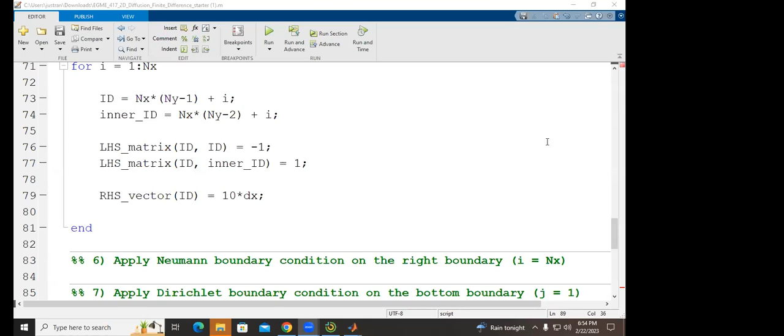Dr. Tran, this meeting was already recording when I stepped in. Yeah, it starts recording when the first person shows up. I have it saved to the cloud because I'm using the podium computer, not a personal laptop. In the past, I recorded locally and had to wait for it to process, but since this class ends at 8:15, I don't want to wait an extra 30 minutes. So I record to the cloud, and because of that, it's just the first person that shows up that starts the recording.

I was just worried that you're going to get an hour of nothing because maybe the person beforehand left it on recording.

Sir, I have a quick question. Can I share my screen? It's about the grading. I have no complaints, but I'm confused about something. Thank you for allowing me to share. Let me go to the grades. Okay, so can you see my screen? Yes. So I noticed that for assignment number 2, it went to Turnitin, and I'm not worried about that because my work is original.

However, I got a high plagiarism percentage because I copied and pasted the questions of the assignment into my homework. That happens a lot in this class because everyone's kind of turning in the same thing, and if you copy the questions directly from the homework, that's going to flag because everyone has that too. There are some cases where it's like 90, 95, 100%—that's obviously suspicious. But for most people, they end up in the 60s, 70s, even 82%, and I check all of those.

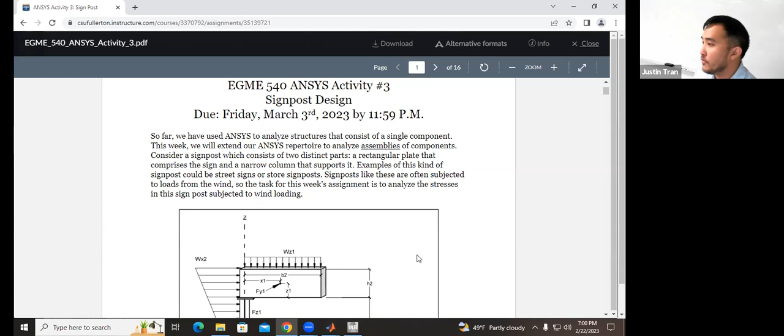All right, so today is the only lecture we're having this week, but thankfully it's an exciting one. We're on our third ANSYS activity, 3rd out of 8 in this class. This one's interesting because it's going to be our last activity on the basics. After today's activity and all the lectures we've had, I'd say you have a good grasp of all the basics for ANSYS.

After today, you guys are ready to do a more independent project, which is going to be the midterm project. On Monday, we're going to discuss the midterm project, what it is, what you're expected to do, and then you'll have about a month to work on it. But for today, we're just going to be doing an activity.

The point of today's activity is to get you familiar with how to work with assemblies. In reality, I don't think it's that hard. I'm just making you more aware of the options you have when you have multiple parts in your assemblies, more so than just one component.

The subject for today's activity is going to be a signpost. Visually, it looks like one of those signposts you see over the freeway that tells you you're about to miss your exit. You have a big rectangular sign supported by a cylindrical post, and then it's all fixed into the ground at the bottom of the post.

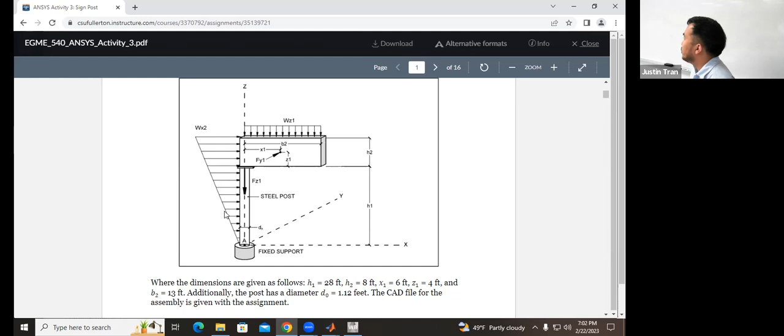The dimensions for the signpost are here, but that's kind of irrelevant because I give you the CAD file, but you can verify those measurements. And we have all the loads here as well.

Similar to the last activity, I'm going to focus mostly on the new stuff. A lot of the basic things like meshing and applying the boundary conditions, I'll leave it mostly up to you, and we'll focus on the newer things in this activity.

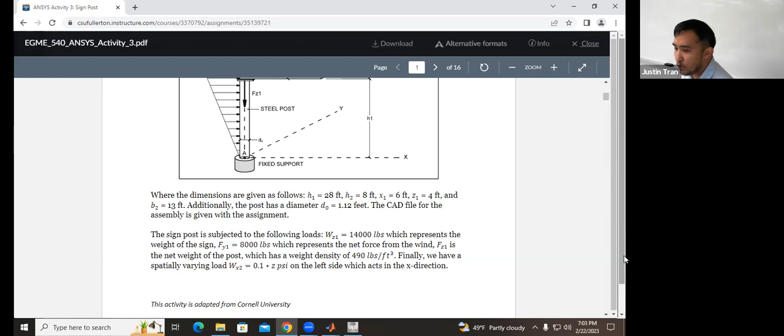To get started, you can download the activity instructions from the website. Go to assignments, go to assignment 3. This first link is the activity specifications, and then we have 2 CAD files. The first CAD file is the one we're going to use in the activity, and the second CAD file is for an extra assignment on top of that.

So that's the plan for today. Are there any questions I can answer before we get started?

All right, let's go ahead and get started. Go ahead and download the CAD file here. Let's open up Workbench.

Just like before, let's go ahead and create a static structural analysis here. Then let's load in our geometry. Right click on geometry and import, then import the geometry that you downloaded. It should be solid signpost geometry base.

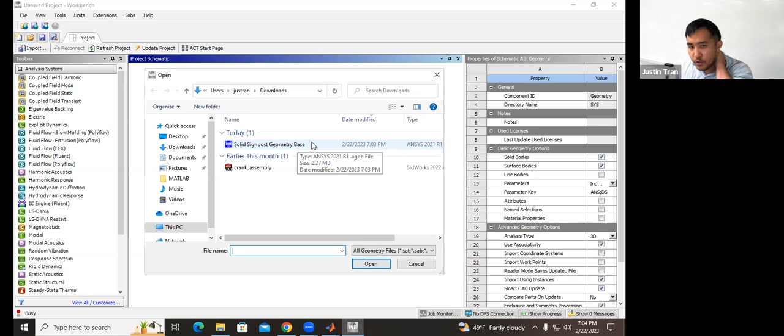The nice thing about this geometry is that it was actually created in ANSYS, so there should be no compatibility issues whatsoever. Let's go ahead and double click that. Automatically what you should see is a green check mark next to the geometry that tells you your import was successful.

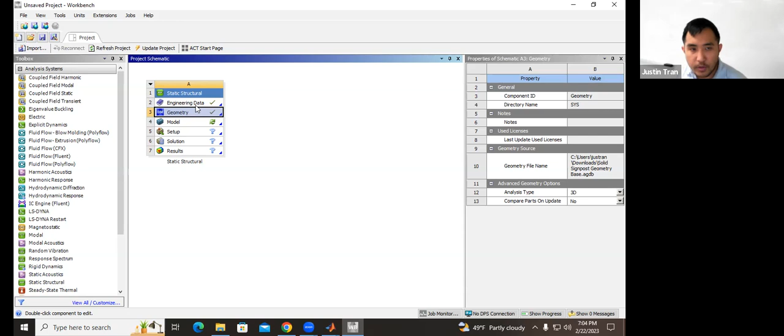Before we jump into Mechanical, let's make sure that we have all of the material properties that we need. So let's go ahead and double click engineering data.

You'll see that the only material we have right now is structural steel. So for this activity, we're going to need another material, because one thing I'll illustrate later is that when you have an assembly of parts, you can assign different material properties to each of those parts. So let's add aluminum here, but let's do it the lazy way.

We're going to use the pre-built aluminum that's already in ANSYS. To do that, let's click on engineering data sources—it looks like a series of books right here. When you click on engineering data sources, it should open up another menu, and from there you should be able to add any kind of material you want. There are three menus here.

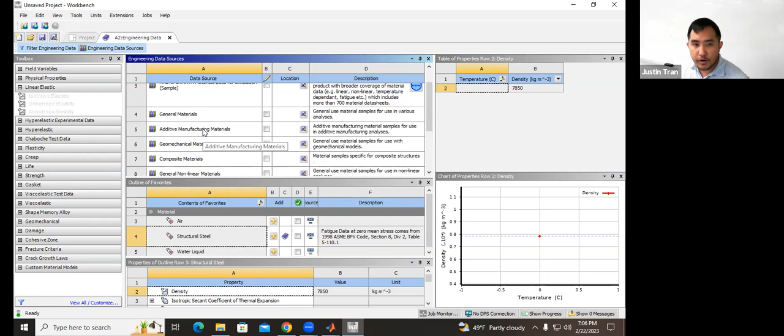Let me lower the bottom one so you can see. This top window, called engineering data sources, shows all the different sources of materials you can have within ANSYS. We have ANSYS GRANTA material data for simulation, which is super long, general materials, additive manufacturing materials, geomechanical, composites, general nonlinear, explicit hyperelastic materials—all good stuff.

The material we want is inside general materials. If you left click general materials once, that's going to change this middle menu right here, and you'll have a lot more options available here in the middle.

If you scroll down this menu, you can see there's quite a few options—not that many, but a few. We have aluminum alloy, concrete, copper, FR4, cast iron, magnesium, polyethylene, stainless steel, structural steel, titanium alloy. So there's a lot of stuff.

To add one of these materials to your workspace so you can use its properties, you click on this plus arrow next to the material. For this activity, we're going to make use of aluminum. Let's left click on aluminum.

If you left click on aluminum, you should see a book appear next to that aluminum alloy, telling you that it was added to your project. You just click the plus arrow once.

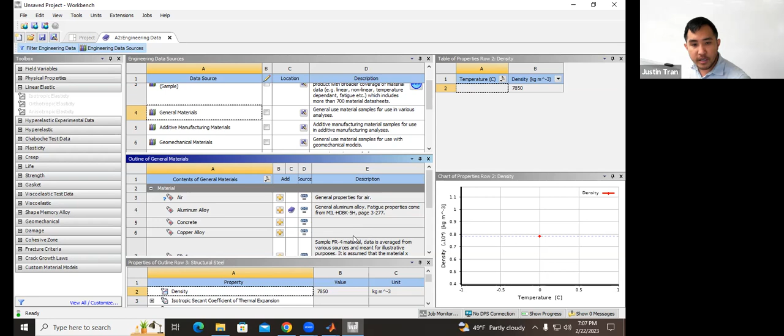If you want to verify, left click on engineering data sources again, and that'll close this menu. Once closed, you should see that you have two materials now: aluminum alloy, which we just added, and structural steel, the default material.

If you're doing a project and using a material that's inside the library, I'd recommend using the ANSYS ones, or at least checking what the properties are before adding your own material. We can check and verify these material properties as well.

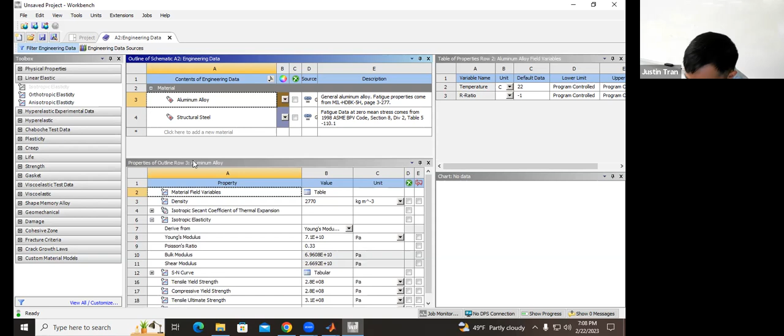If you left click on the aluminum alloy, we can check its material properties here. The nice thing is that it not only adds the linear elastic material—so we have the Poisson's ratio and the Young's modulus—but also the density, and you'll see today that that's actually going to be useful. We'll use the density for something in the activity.

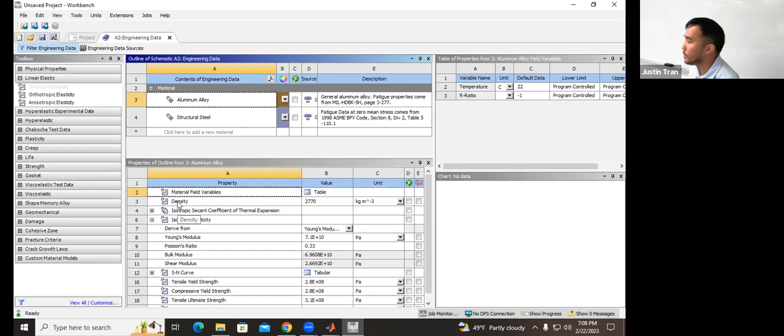So was everyone able to add aluminum alloy using the engineering data sources? Any questions on this part? All right, now that we've added the material, let's go ahead and close this.

Let's open up ANSYS Mechanical by double clicking on model right here.

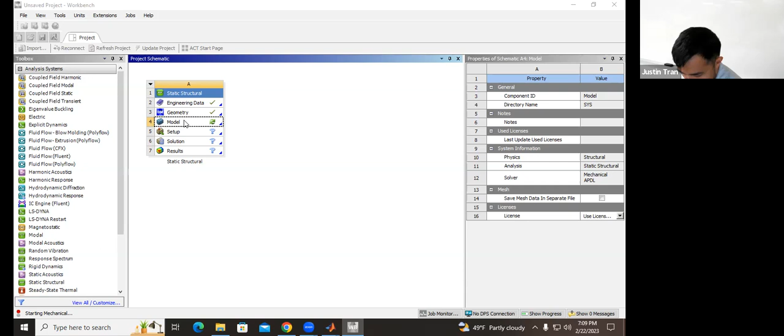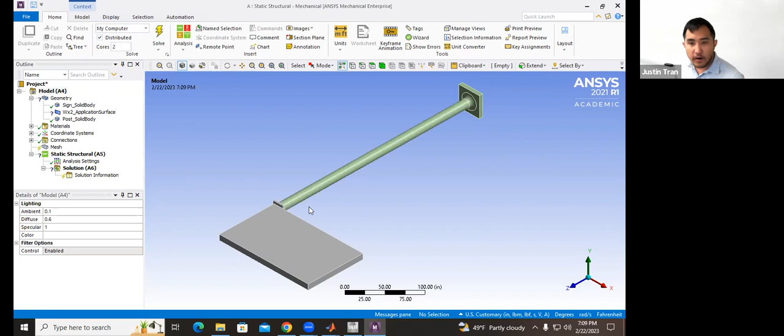If you imported the geometry correctly, you should see the signpost. Dimensionally, it's a little different than the one in the picture, because the picture isn't to scale, but you should see something that looks like this. The first thing we'll look at here is the geometry section.

You should have three objects there: a part for the sign, a part for the post, and this WX2 application surface with a question mark next to it. We'll come back to that in a second.

We'll talk about what that question mark is, and we'll first talk about what this surface actually is. But first, we'll assign the material properties for the post and the sign.

When you're working with an assembly of parts, oftentimes those parts are made of different materials. So the first thing you need to do is assign the proper materials to each part of the assembly. Let's start with the post. If you look at the project specification, you'll see the post should be made of structural steel. To check the material your part is using, left click on that part in the geometry tree, then check the details menu on the bottom left to see the material assignment.

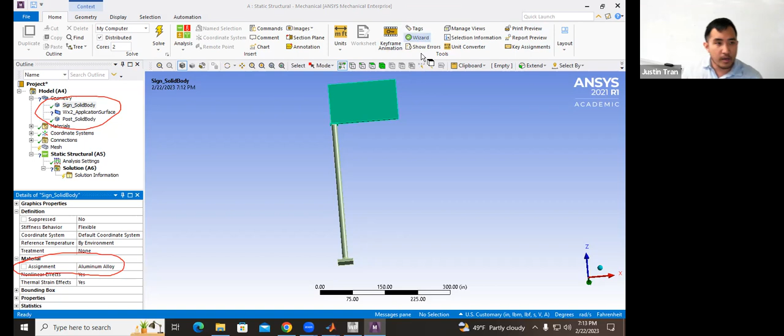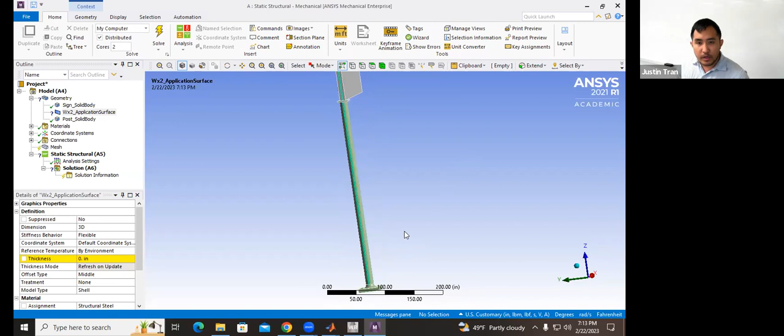Now let's go on to this WX2 application surface. You can see it on my screen — when you click on WX2 application surface, the left side of this post lights up. If you rotate around, you can see this surface is like a thin strip, almost like a strip of duct tape that goes from the top of the sign to the bottom. If you zoom in, you can see it's basically just a very thin strip — its thickness is nothing.

A surface like this, I like to call a phantom surface. It's a part that's not structurally part of the original geometry. If you look at a typical signpost on the freeway, there's not going to be a very thin piece of material running down the side. So this strip doesn't actually exist in the real geometry — its purpose is to allow us to apply a loading in an interesting way.

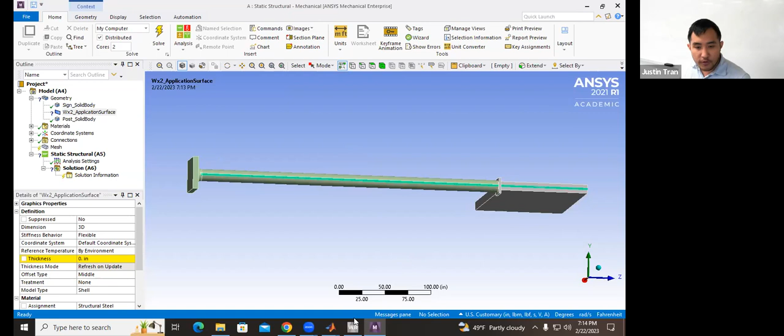If you go back to the project activity specifications and look at this diagram, we have this load called WX2. WX2 is basically pushing on the signpost going from left to right.

And so what that load represents is the wind load. When you have wind blowing against the sign, that load represents that. What's unique about this loading is that it's a variable load - we'll talk about that in a bit. But this loading stretches up from the very top of the signpost all the way to the bottom.

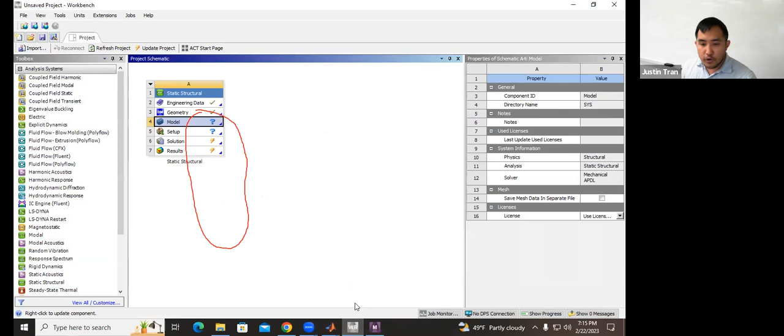Okay, if you go back to mechanical, we know from previous activities that if you want to apply a load onto a part of the structure, you have to be able to click on that surface. You could click around all you want here - try clicking on the post, try clicking on the sign, on each edge. There's no natural surface on this geometry that stretches from the very top to the bottom. Nothing is going to give you that exact surface.

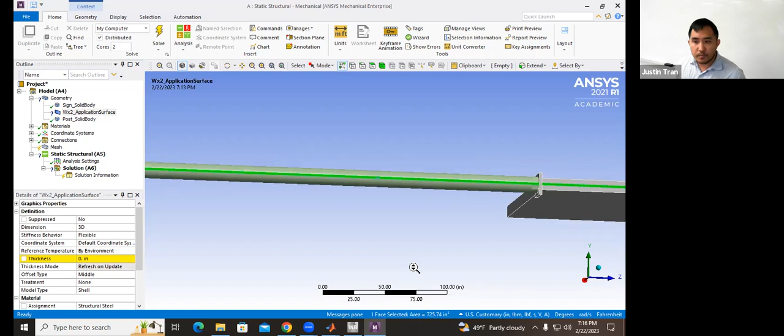But because of the way this is loaded, and because of the way we want to set this up, we want to apply a load that stretches from the top to the bottom. One way to accomplish this is to specify a phantom surface like this so that you can apply this load. If you click on this surface right here, you can see that it actually does stretch from the very top to the bottom, which normally would be impossible with just the natural geometry of this CAD file.

So what the author of this CAD file did was create that surface so that we could apply that load. This is a fairly common technique because a lot of times you're going to want to apply a load on a surface that may not be natural to your geometry. So this is basically what you would do.

The only thing we have to specify here, and the reason why we have this blue question mark, is that because it's a phantom surface, we don't actually want it to have any physical thickness. So this person specified it as a pseudo 2D surface, or pseudo shell surface, where you have to specify the thickness manually. If you look down in the details window, that's the thing it's asking you to specify.

Dr. Tran, I have a question - from my understanding, whoever designed this CAD already inputted that quote unquote phantom surface. Yep. Will we learn how to do that ourselves eventually? Yep, yep, I have a handout for it. It's online, and we'll go over it before we talk about the project. Sounds good.

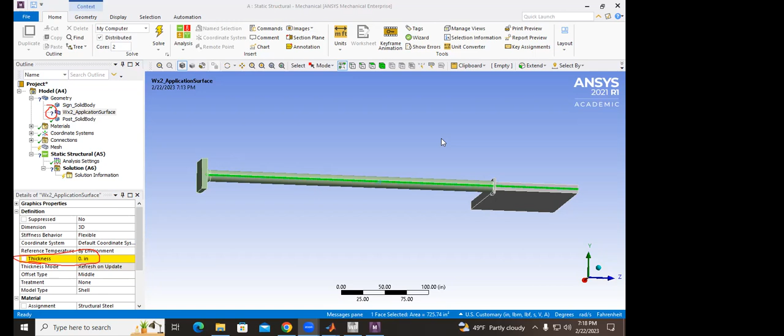So the main thing is that we have to specify a thickness, because right now ANSYS doesn't know that this is a phantom surface. Only we, the users, know that this surface actually shouldn't exist in the geometry. So when ANSYS is asking us for thickness here...

Okay, question? So you said 0.001. Yeah, it doesn't really matter. You can do 0.001, you can do 0.1, as long as it's small enough that it doesn't matter. I just like 0.001 because it's really small.

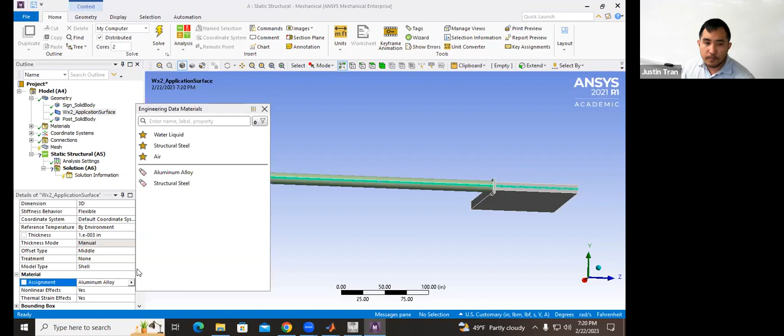Right, and of course, this strip here is registered as a separate part in the geometry. Technically you can also give it a material, but because it's so thin, it's not actually adding any structural strength. So it doesn't really matter what material you assign it - you can give it structural steel, change to aluminum if you want, it doesn't matter because it's so thin that it won't add anything of substance.

All right, any questions on this? Okay, so that's the geometry, right?

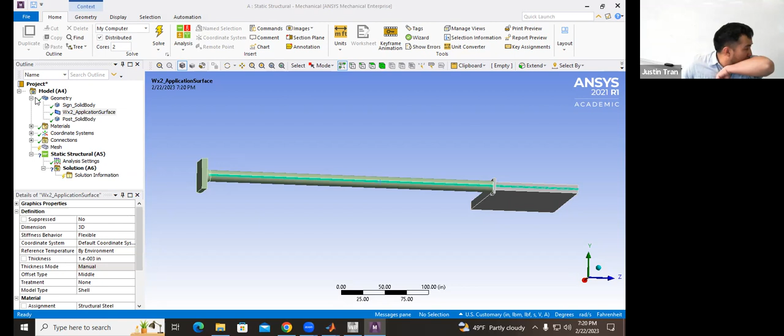Okay, so first thing when you're doing assemblies is that you need to assign materials to all the parts. That part is fairly obvious. The next part we'll talk about in assemblies is connections.

When you have multiple parts in an assembly, you need to define to ANSYS how these parts are going to interact. Let's look at one contact region here to illustrate what I mean. For me it's contact region 2, but for this part it doesn't really matter all too much.

What you'll notice is that if you expand this section for connections and go to contacts, when you click on each contact region, it should show you the two parts that are in contact and the area where they're in contact.

For this contact region 2, this is the contact between the sign and the post. If you look at this, we have these two surfaces here which are interacting with each other. ANSYS gives you the option to define how this interaction is going to go.

The main thing you'll see in the bottom left is the type. The type of connection will basically tell you how those parts are going to interact. The default is bonded.

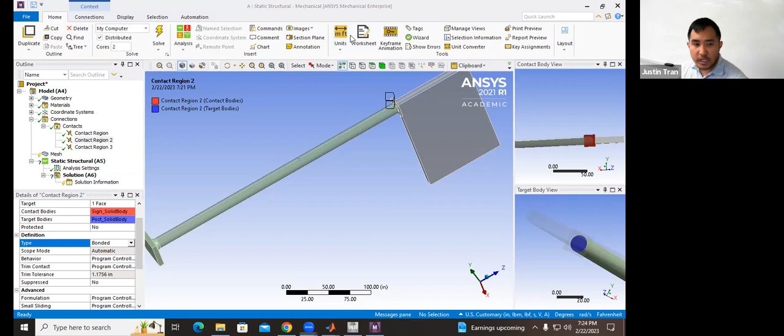But for now, for this activity, we're not going to change these contacts. We're going to keep it as bonded for all 3 regions because we want them to be bonded together.

That's another thing you have to take into account when doing assemblies - make sure the contact regions are exactly what you want. For certain situations, which you'll see in activity 4, you may have to create the contact regions yourself, but we'll cross that bridge once we get there. For now, I just want to show you what the contact regions are and what bonded means, because that's important. Any questions on this so far?

Another thing I'll show you, which I forgot about until I looked at the activity, is that you can rename a lot of things in ANSYS. Renaming, as mundane as it sounds, is actually really useful. It may seem trivial for a case like this where we only have 3 parts and 3 contact regions, but when you start working with more complex assemblies with maybe a dozen or even dozens of parts, it starts to become a lot to keep track of. So to help with that, it's useful to rename some things so they're easier to refer to.

If you just look at this list - and you could see me struggling with it a little bit earlier - when I see contact region 1, 2, 3, I have no idea what those are referring to. I had to actually click on them to see what they're referring to. So what you can do instead is rename these to make them more useful to you in the long run.

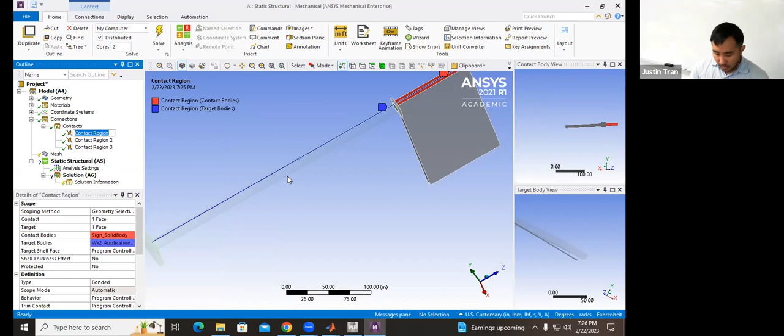For instance, for this contact region here, I can see that it's the contact between the phantom surface and the sign. So if I rename this - and you can rename it a couple ways, you can right click and click rename, or you can use the keyboard shortcut F2, which is usually what I prefer - we can call this the phantom-sign connection.

Contact region 2 right here is between the post and the sign, so we'll call this the post-sign connection. And contact region 3, we can see from the image is between the phantom surface and the post. So again, it's not something you have to do, but it is useful, especially once you start doing more complicated ANSYS stuff.

All right, let's go ahead and move on to the meshing. I'll let you guys work on the meshing for a bit, but let me show you what I'm expecting. One nice thing about assemblies is that you can apply different meshing settings to different parts of the assembly - we talked about this a little before activity 2 - and we call this mixed meshing. So let's do this.

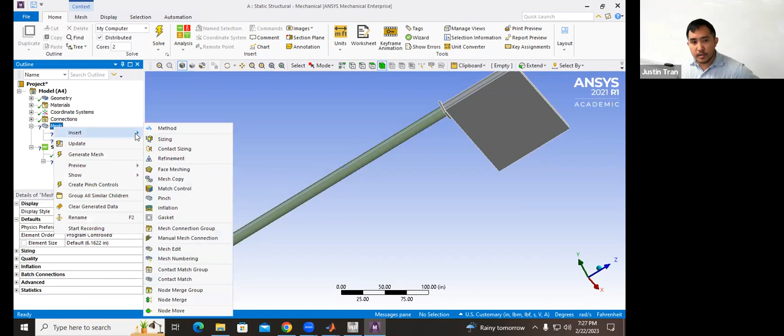Let's create a method object and a sizing object for the sign, and one for the post as well. For the automatic method, let's go ahead and apply this to the sign, and for the sizing, let's apply it to the sign as well. Same thing for the post - we'll have one there, and sizing for that as well.

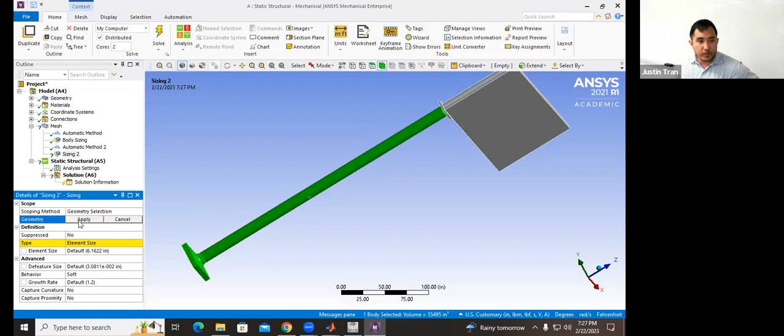You can rename these - usually I like to do this. So this will be sign method, this will be sign sizing, the post method, and let's call this post sizing.

With this, you're free to change your mesh settings for each part of this assembly. This is a good example because if I look at this assembly in terms of how I expect the simulation to go, that's going to tell me how I'm going to mesh this geometry. So first, for the method, the main thing you can change is the shape of the elements - we have two options.

So we have hex dominant and tetrahedrons. If you look at the sign geometry and the side of the post, both of those have pretty different geometries, right? So based on our lectures on meshing, you should be able to determine what's the best shape that's going to work best for these parts.

And then for the sizing as well, remember we talked about how mesh size is directly correlated to the accuracy of the simulation. And usually when you're running a structural simulation, you want to have the most mesh density in the region where you expect the stresses to be the highest.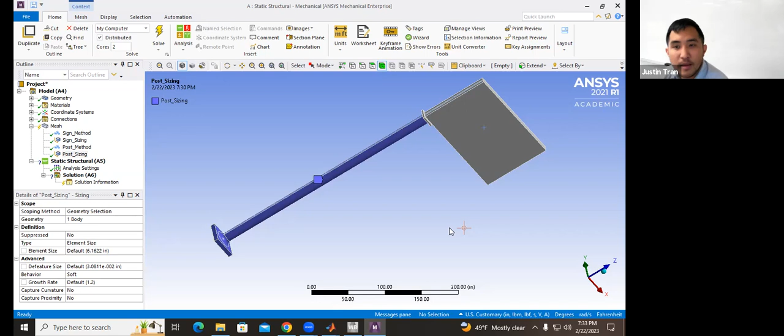All right, Ivan, go ahead. Thank you sir, I was looking at the case that we're working with.

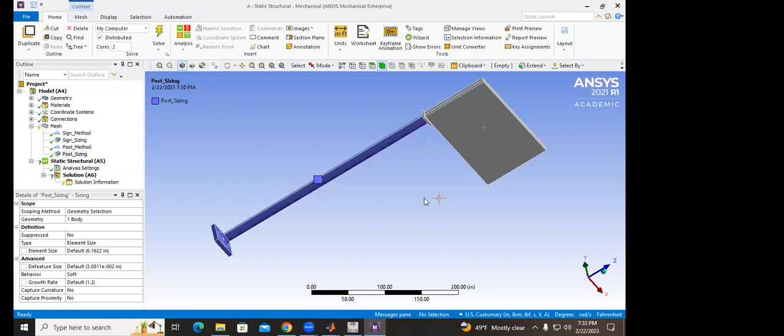You mentioned to focus on the area where higher stresses are expected to occur, and I'm thinking about this in solid mechanics terms. I have a simple question: is the area where the stresses are high the same area where the highest deformation is expected to occur, or are those two areas completely different?

Good question. The way deformation is computed in ANSYS is that it takes the original position—this is the original configuration of the signpost. After you apply all the loads and constraints, it deforms into a final configuration. The deformation is simply the subtraction between the original configuration and the final one—that is the deformation.

So it could be, in certain situations, especially ones with a lot of bending—like in the case of a cantilever beam—that the highest deformation would be at the tip, but the highest stress would be where it's supported. Yep, exactly. In that instance, highest deformation and highest stress are in different areas.

I'm just trying to make sense of all this. Sure, yeah, it helps to talk through it. Definitely good, thank you sir.

Quick question—how do you reset the layout? So usually I go up here to Layout, and then Reset Layout right here. It's in the top right.

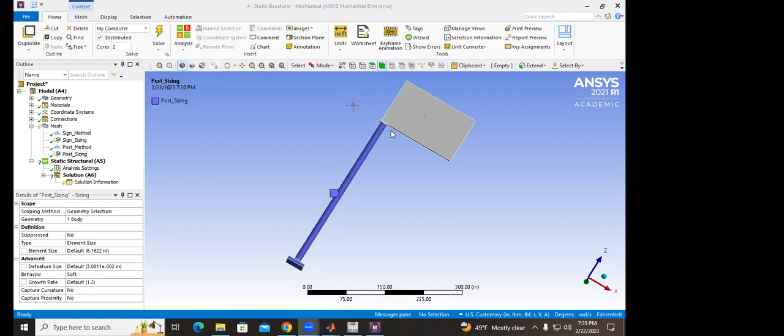Professor, so for the sign, I'm still not entirely clear which is the best method for the mesh.

Tetrahedron, hex dominant, sweep, multi-zone, Cartesian, layered tetrahedrons. Based on our last assignment, it seems like we should be doing hex dominant a lot and less otherwise. Yes, your main two options here are going to be either tetrahedrons or hex dominant. The rest we'll get to later, but the only ones we've really learned so far are just the tets and the hexes.

Tets are these kind of pyramid-looking elements. Their main benefit was that you can use tets to mesh any geometry, so they're going to work for anything. The downside is that they don't really fill the areas very efficiently. So if you mesh with tetrahedrons, it often takes a lot of elements to fill a space, and a lot of times those elements aren't efficient. It takes more elements to do that, and it's going to drive the cost of your simulation up.

Hexahedrons, on the other hand, look like bricks, and sometimes people call them brick elements. So for something that's square like the sign, hex dominant would be perfect. And then for the post, hex dominant is preferred.

But if that doesn't work... which one is better for square stuff and which is better for round stuff is what I mean. So you can get hexes to work on round things. And actually for this cylinder, even though it's round, it still has a very nice structure - it's pretty well structured, like it's just a rod basically.

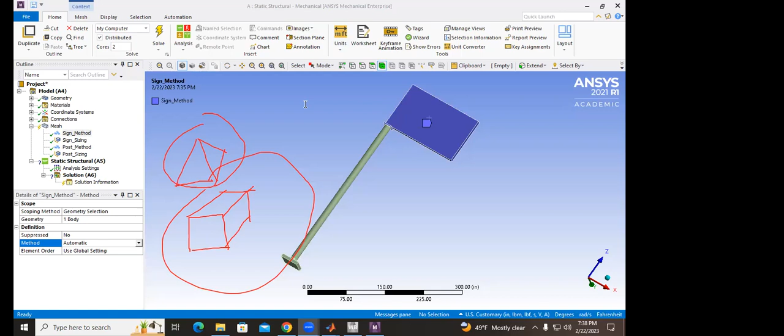All right, question, Mario. Yeah, someone asked a question in chat, and I'm just making you aware of it. Yeah, I'm getting to it right now.

So the question in the chat: since adding refinement makes the element shape triangular, is it worth adding refinement if it loses the rectangular type elements? Yeah, that's a really good question, and that's a trade-off you have to think about in a lot of situations.

If you remember from activity 1, an extra meshing option you have is that you can add mesh refinement in a certain area, and that will refine the mesh relative to the areas around it. But one downside to that is it switches the element shape to triangular versus rectangular.

The reason that exists is that for a lot of geometry, sometimes you don't have a choice, so sometimes you have to use a triangular mesh just because of how complex the geometry is. For those situations, it doesn't matter - adding the refinement is going to be a net positive because it's going to give you a refined mesh. But for cases where you have a good rectangular mesh...

It's kind of debatable on which one is better or not. Personally, I'd say in most cases it's better to use the rectangular mesh, and instead of using refinement, you can use a local sizing option instead. So let's say you wanted to refine the mesh up here.

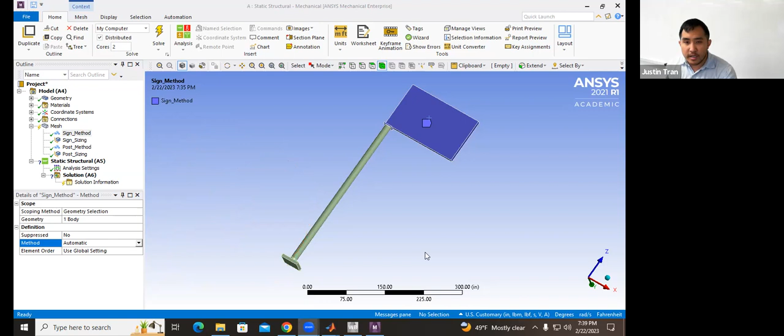Right where these two connect. Not saying that's a good decision in general, but let's say for instance we want to do that. So what you can do instead is add an extra sizing object, maybe add a phantom surface if you want to be fancy, but maybe you just want to click on just this edge right here.

And so what you can do there is change the size from there. And so you can kind of create the same effect as mesh refinement. It's not quite the same, it doesn't refine it as well as mesh refinement, but oftentimes it does do a good enough job.

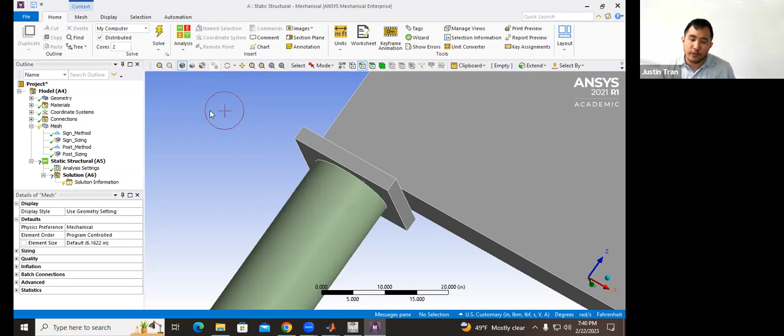With the sizing object, you're able to retain the same shape as before while still refining the mesh. Personally, that's what I do a lot of times, try to preserve the shape because the hexes are really valuable if you can use them. I personally prefer to use the hexes, but different people in the field have different thoughts on that, so it's definitely not a clear cut answer.

If you guys are done with the mesh, you can go ahead and move on. Everything else is pretty well outlined in the activity report, so you can do the loads and the constraints and stuff like that.

Yeah. Let's stop. What are the sizes?

That's pretty small. Yeah, so it's not getting stuck, it's just trying to. This is a big one, it's huge. So it's about 400 inches tall, so do 0.1. It's about 4,000.

I would start with something bigger. Even I would start with, if you want, the default sizes, I would usually start in that one. Okay, if you find it was small. Exactly, yeah. So each part's different.

For these activities it's a little bit disorienting because I'm just giving you the parts, so you really have no idea how big they are. But in reality you kind of have an idea how big. Okay, yeah, all right.

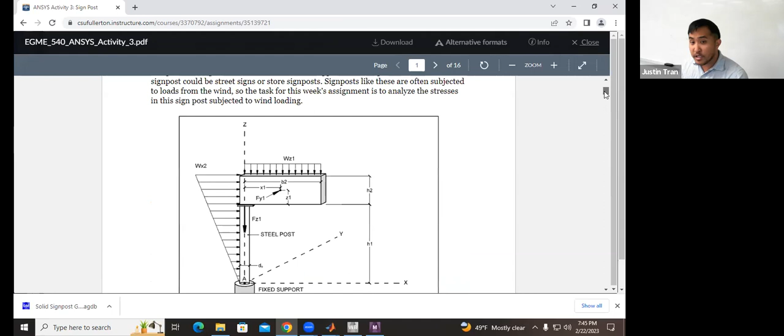This is different from the original diagram. If you look at the original diagram, the weight of the post and the weight of the sign we actually have as separate forces, but ANSYS has an easy way to do it all in one. So let's come back to ANSYS right here.

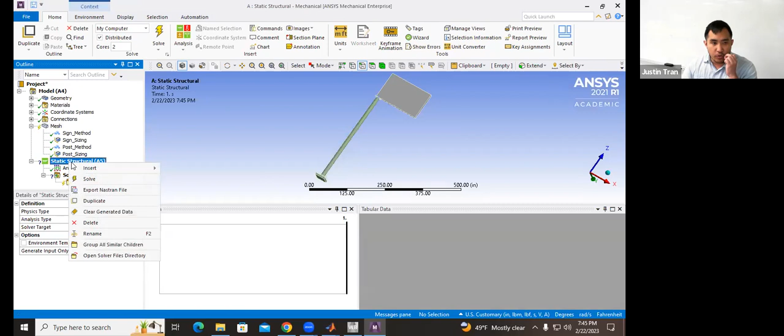Remember, to add loads and constraints, we need to right click on static structural here and then go to insert. So the first load I'm going to add here is called... I need to find it first. There it is. It's called standard earth gravity.

Standard earth gravity means that for each of the parts in the assembly, it's going to compute its weight based on the density supplied in the material properties, and then apply that weight as a body force throughout the entire structure. The nice thing about standard earth gravity is that it's almost like a toggle, so you can either turn it on or off.

You can right click on standard earth gravity, and now it's automatically being applied. We don't even have to select any parts of geometry; we just say that we want gravity to be there. For activities 1 and 2, we've actually ignored gravity at this point, but because now we have a much larger structure than before, gravity is going to be much more significant since these parts are pretty heavy.

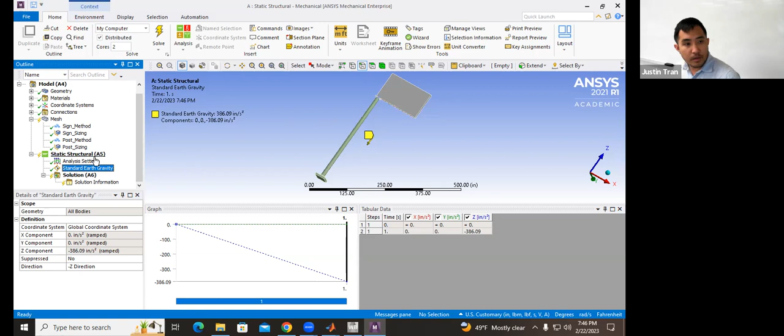Yeah, question. It should be near the top. When you right click on static structural A5, you go to insert, and it should be near the top right here. I don't see it anymore because I've already added it, but it should be right under acceleration. Okay, so that's standard earth gravity.

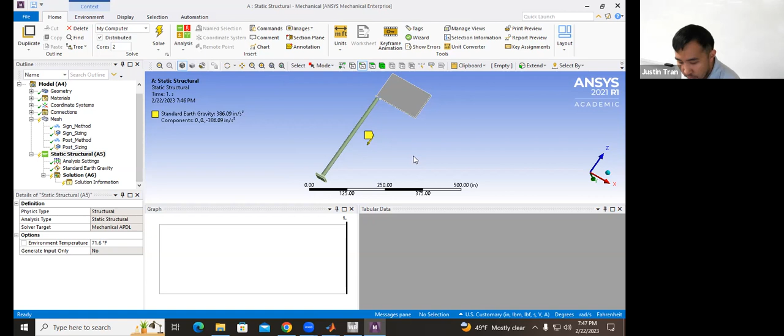The next two loads we need to add are the wind forces. We have two: the wind force acting on our phantom surface, and another wind force applied on the middle of the sign. Let's do the wind force on the middle of the sign first.

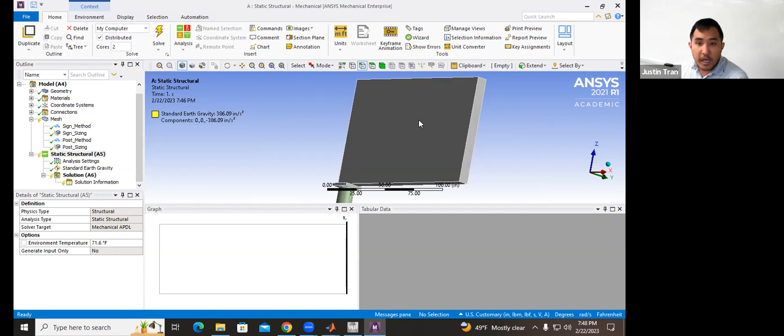It's really hard to see, and if you don't mouse over it, it's actually impossible to see. But the author of this CAD file put an extra point in the middle of the sign—in fact, it might be on the other side here. We have to add the force first. That point is almost like another phantom surface, but it's a phantom point. You can also add points into your geometry for the sake of load application like this. So let's go ahead and right click, insert.

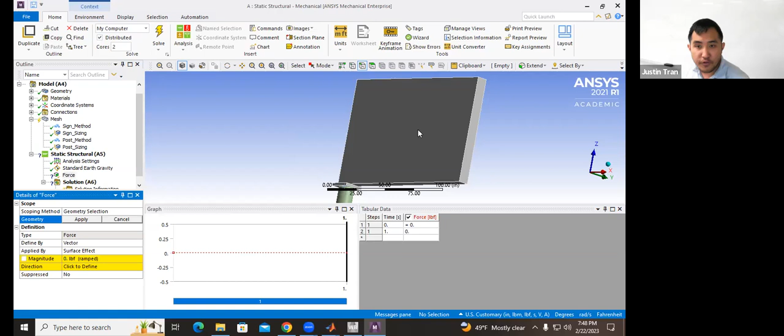Let's create a force object—this is going to be a force load. Then let's find the geometry we want to apply this on. You'll have to search around a little bit for it because it's not obvious, but if you hover your mouse around the middle of the sign, eventually you'll find a point that's on there.

Dr. Tran, is this a feature of ANSYS where it can tell you the centroid of an object? Is that what we're doing? Is that point the centroid? It is, but it's not something ANSYS told you—it was something the author of this CAD file added manually. Oh, okay, so if we were doing a completely new geometry, we would have to specifically state the centroid ourselves. Exactly. Okay, thank you, sir.

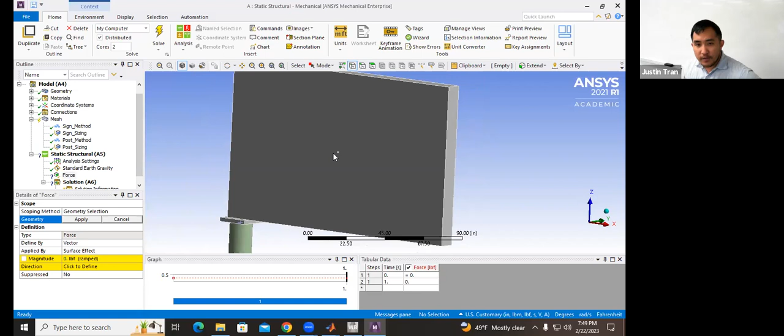If you're having trouble finding it, you may need to switch your selection mode. You can do Control P on the keyboard, or click on the button on the interface called vertex. Once you find it, it's in the middle of the sign, kind of right here. Go ahead and click on it, then click on apply right here.

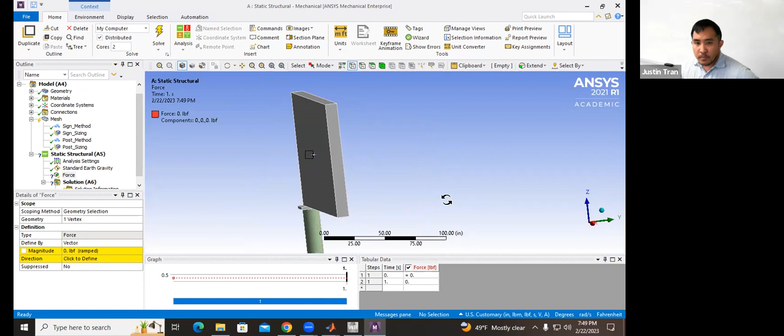Okay, so that tells ANSYS that we want to apply a force onto the middle of the sign. The force that we're going to apply has a magnitude of 8,000 pounds, and it's going to be applied in the Y direction.

And so just like we usually do, let's switch the force definition to components, okay? And then we're going to apply a force of 8,000 pounds in the Y direction. Okay, so just like that.

It should be positive because it should be going into the sign. But due to the symmetry, I think it shouldn't matter. So if you do negative 8,000, it should be okay too. But the way it's defined here, I have positive 8,000. Just a regular force.

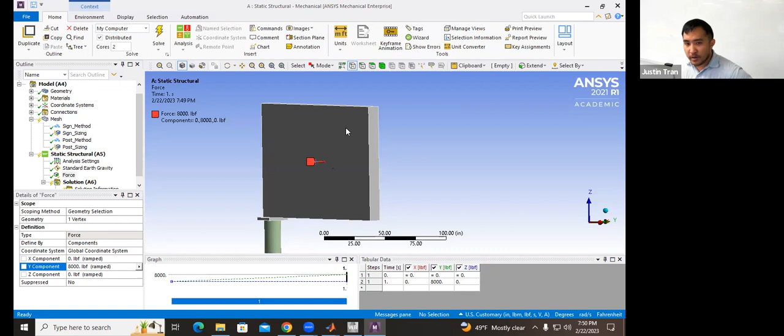All right, and so that's how you can apply a force at a point. I would say this is not the best example of doing this, but there are situations where you would want to apply a force that's directly on a point. Here, it doesn't really make that much sense because we have a nice, big, wide sign surface, and especially the fact that this force here is representing a wind force. That wind is going to be applying force pretty equally across the sign. So, to me personally, I think it doesn't make that much sense to apply it as a point. But I have it in this activity just to illustrate to you that you can apply a force at a point, and that's kind of how you do it.

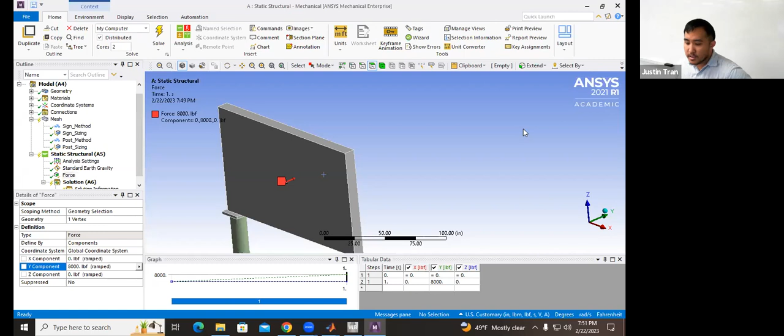Dr. Tran: For this instance, would a pressure force also be suitable because it's a force per area? It would be, yes, but you would have to compute the force, or the pressure, manually, because, like we talked about last time, pressure and force can kind of be interchangeable, but you want to make sure that the magnitude of the force overall is going to be the same. I see, thank you, sir.

Okay, so that's the point force. The other thing that we need to do is apply the wind force that's on the side. That's kind of the whole point of this phantom surface. So let's go ahead and apply this as a pressure. Let's right click on Static Structural A5 and insert a pressure.

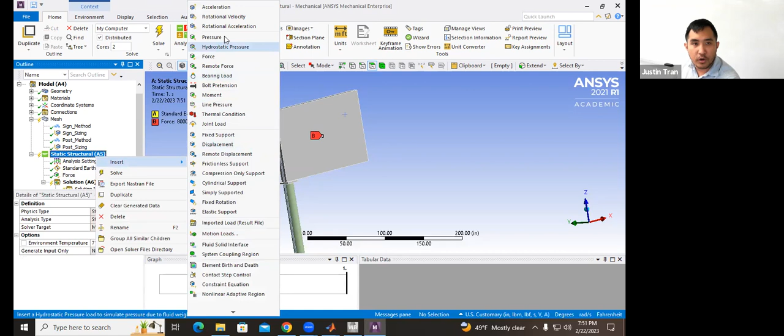And for the pressure, we're going to select our phantom surface. Go ahead and mouse over that, click on that, this one. So our application surface for this pressure force should be the phantom surface that goes along the side of the signpost.

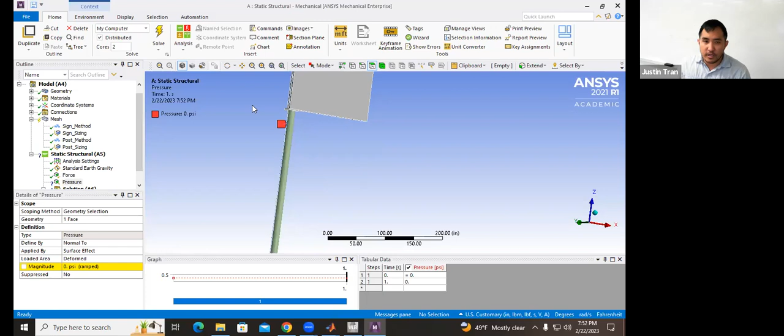And so what's unique about this pressure force here is that it doesn't have a uniform magnitude, right? If you go back to the project specifications, you can see that the magnitude of the wind force has a higher magnitude up top and a lower magnitude on the bottom. So it's basically like a ramp force here. And ANSYS has a way to apply that.

And the way we do that is basically the same way as applying functions in Microsoft Excel. But before we do this, we need to make sure that we're in the right unit system. When we're applying this force, we're basically going to be inputting a function, and ANSYS needs to know that we're applying this function in the right units. So when you go to units, you want to make sure that you're on this last option for US customary that is in inches. That basically tells us that our magnitude of pressure is going to be in PSI. So before you input anything into the function area, make sure that you're in US customary under inches. Any questions on this?

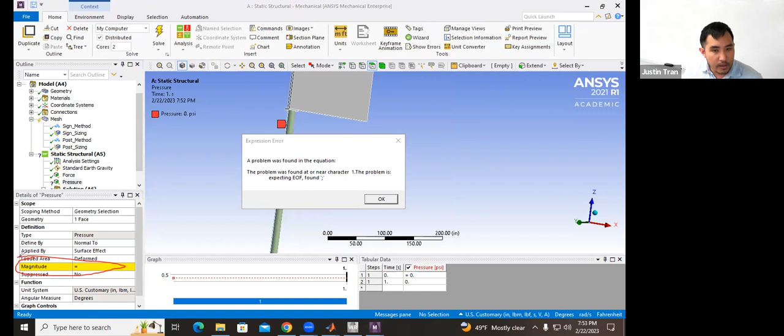Good. Okay, so now that that's done, let's go ahead and input the magnitude of the force. When you want to add a spatially varying force, you're going to have an equal sign. That equal sign tells ANSYS that you're going to input a function. And it's complaining because I didn't actually do that yet, I just wanted to circle it so you know.

And then from here, you can input a function. Some of the variables that you have available to you are going to be the X, Y, and Z coordinates. And so in this case, since we want to have the force vary in the Z direction, we're going to have a function of Z. The function that I'm going to input here is 0.1 multiplied by Z.

And so I'm going to go ahead and hit enter. And so what that's going to do is change the magnitude of the force.

Maybe it's just not in this version, but in other versions, sometimes when you click on this it should show you the magnitude of the force, the maximum and minimum. Not here, but it should show on yours. So it should have a maximum magnitude of about 43.2 psi.

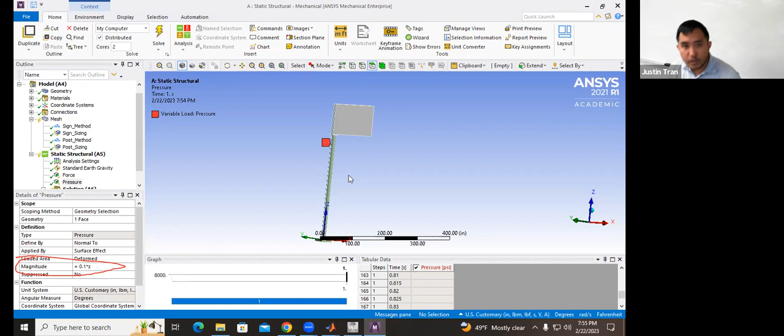I'm not sure why it's not showing on mine, probably because I made that error earlier. But if you inputted this function correctly, it should have that magnitude. So let me go ahead and delete this, and I'm going to try making it again one more time just so you can see it.

So you can kind of see it down here. For some reason it's not showing up on the figure. That's okay. Yeah, I'm not sure why it's not showing up there. That's kind of weird.

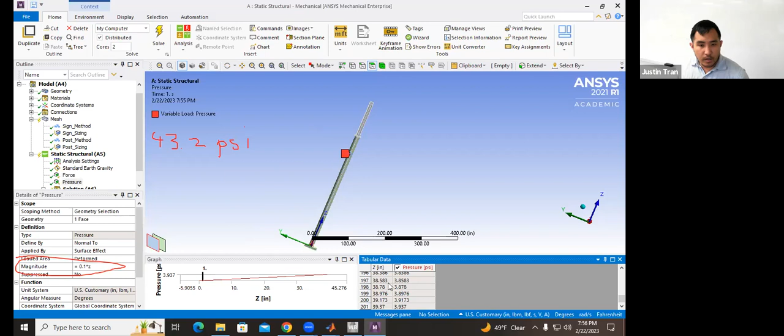Professor, your mesh is not created yet. Oh, that's true, I haven't created the mesh. Thank you for that. There we go. Okay, thank you for that.

So my mesh is kind of ugly because I didn't change the settings, but hopefully yours looks different than this. But you should get a maximum pressure of about 43.2 psi.

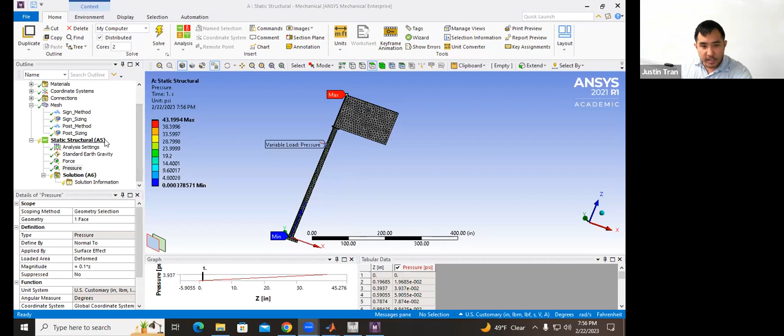All right, the last thing we have to add here is of course our fixed support, and I'll go ahead and give that one to you too. We're going to add our fixed support here. We can't run a structural simulation without a fixed support. For this one it should be pretty obvious: the signpost is going to be attached to the ground, so we want to fix it on this bottom part of the post right here.

Okay, now that we have the loads and constraints and the mesh, I'm going to go ahead and add in our results. So let's go ahead and look at the total deformation, and let's look at the equivalent stress.

Yeah, the bottom face down here is the fixed support. Okay, so I'm going to go ahead and run the simulation.

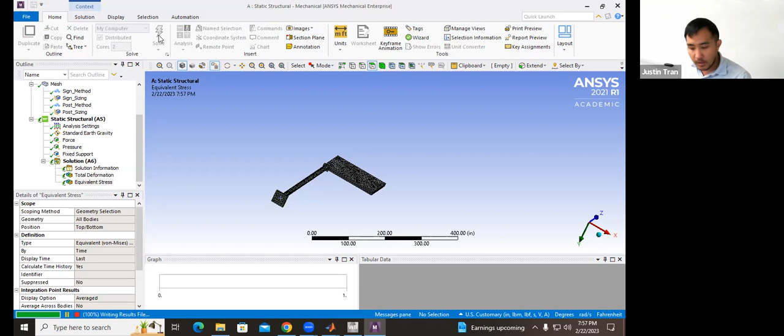I think in the activity document I give you a few more result fields, so make sure you're doing all those result fields. But I did want to run it first just to illustrate what I was talking about earlier. So I'm looking at the equivalent stress field, and let me turn off the mesh here so you can see it a bit better.

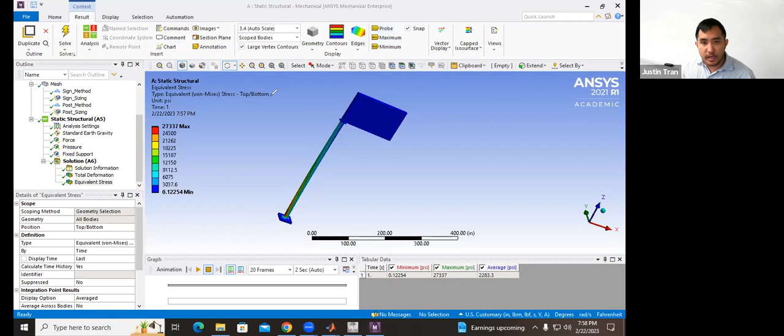There we go. Okay, when you look at the equivalent stress solution here, it should look something like this. If you look up in the sign, in this area right here, you can see that we have zero stress. Whereas for the post, you can see that we have a very large concentration of stress right here.

And so that should tell you how you should design your mesh. Generally speaking, when you have a finite element simulation, you want to have a high concentration of elements where the stress is going to be the highest. From these results, we can see that we should put a lot more elements in the post, because that's where the stress values are interesting. But in the sign, which has no stress at all, we're more free to coarsen the mesh right there. Okay, yeah, question.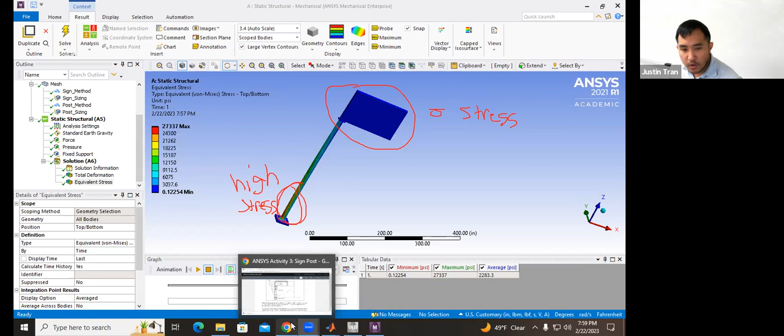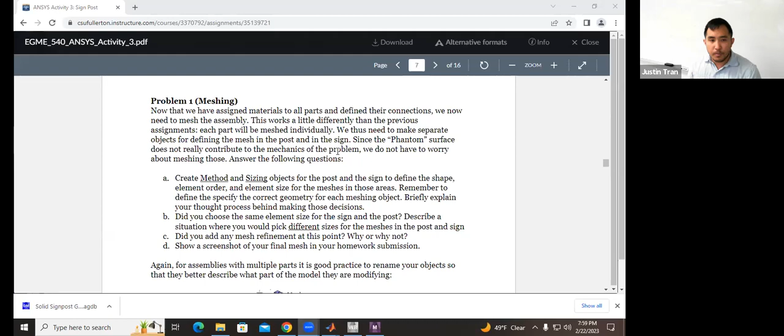We basically did problems 1 through 4 mostly. There's some parts you have to explain, especially in problem 1, but we kind of walked through those parts together. For problem 4, I also want to see the normal stresses as well as the shear stress, so make sure you have those.

Problem 5, I call it post design. Now that we have the simulation results for the post, we're free to redesign the post to make it more stable. If you look at these results here, at least for my simulation, we're getting a maximum stress of about 27,000 PSI. Probably for your guys' simulation you're getting a different stress because your mesh looks a lot better than mine, but you're getting a fairly high stress down here.

For problem 5, I want you to change the geometry of the signpost so that your maximum stress is lowered. But I also don't want you to change the overall dimensions of the signpost - it should stay the same height and the same width. You can't make this sign shorter than it is, because otherwise cars are going to run into it as it's going under the freeway.

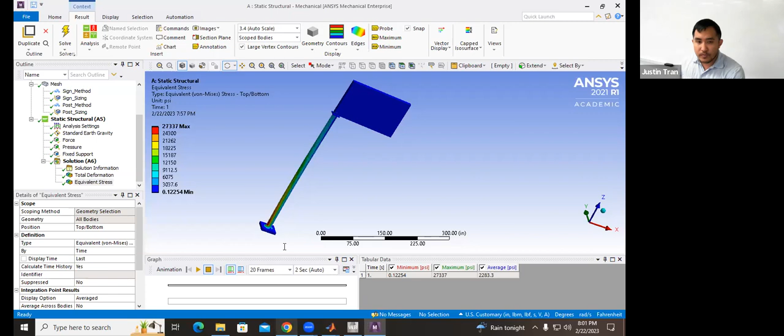Some things you can change: you can change the thickness of the sign to be a little bit thinner, and that's going to shave some weight and reduce the stress. Another thing you can do is change the diameter of the post. You can also change the material of the sign - maybe to something less dense. So I'd say those three are kind of the main ones you can do.

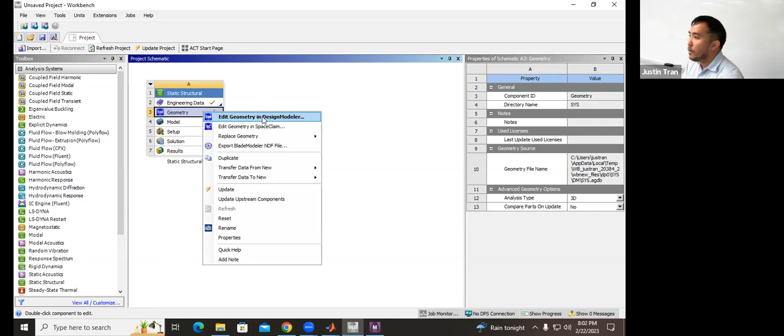But I want you to change something in the geometry or the material. If you want to change the geometry, you're going to have to go back to DesignModeler and edit this geometry there. From there you can change the dimensions of one of the parts of the assembly. So that's problem 5 - change the geometry, rerun the simulation, and show me that the maximum stress did go down.

Problem 6, I want you to think of two different other loading scenarios. The loading scenario we've done so far is a fairly basic one - we have the weights of the sign and the post, and a couple wind forces. I want you to think of two other scenarios the signpost might be subjected to, and simulate those as well. You can do this on the original geometry or your redesigned geometry, it doesn't really matter to me.

Maybe some instances you can think of: maybe you have a really fat bird sitting on the edge of the sign right here, adding an extra weight on the sign - that would be one scenario. Maybe a car ran into the sign on the bottom, so you add an additional force down here - that would be another scenario. So be creative.

I want you guys to get into this habit of thinking not just of the default scenario your geometry is subjected to, but what are some additional things you can think of. Because, like we discussed before, the benefits of finite elements is that you can easily simulate all these alternate scenarios, and it's very easy to do. This is something you'll have to do for your midterm project as well, so getting into this habit of thinking of alternate scenarios and simulating them is a good habit. Have some fun with this, be creative.

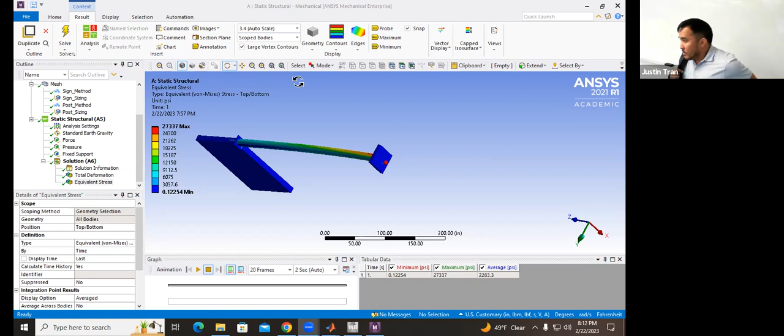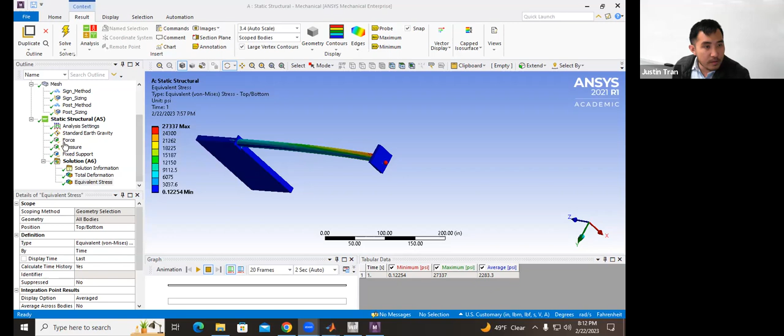Dr. Tran? Hey Chris, what's up? What load should we apply to the sign in terms of the force? I missed what you said. The sign has a wind force of 8,000 pounds, but it's applied onto this small point here in the middle. Okay, the point I understood, I just didn't know how much. Oh okay, yeah, it's 8,000 pounds.

I'm running ANSYS 2023. Yep, that's fine.

For the pressure where we did 0.1 times Z, just above the magnitude it says loaded area deformed. The instructions don't have that deformed option, should we worry about that? No, just leave it on the default. I think the instructions were probably done in like the 2019 version. It must be a new thing they added, but if it's there by default, then that's what it was before, so that's fine.

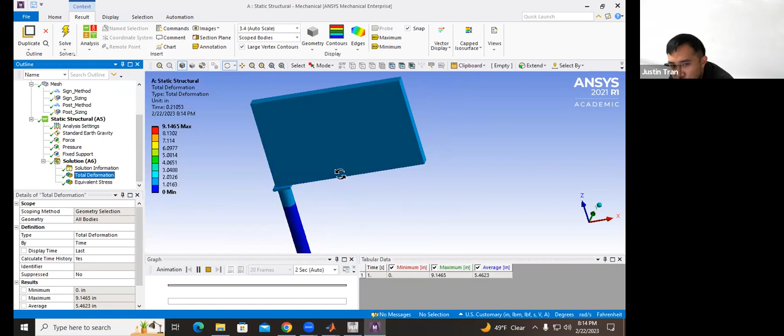What's the difference between initial and deformed, do you know? That's a good question, something new they added, so I don't know exactly what they mean by that. I think based off reading, when you apply the load the whole geometry is going to deform, right? So when applying that time-varying load, it may be because the coordinates of the sign are shifting as it's being deformed. So maybe the deformed state means you take the deformed coordinate of Z versus the initial coordinate of Z. That's my hunch, but I'd have to look it up to check.

Is the pressure, the force from the wind on the sign, negative or positive, or does it matter? It shouldn't matter because it's symmetrical in that direction. Okay, I did it as positive. Okay, I just want to be consistent.

For sure, okay, that's all I have. Okay, cool.

I'm looking at your weather on your computer, 49 degrees Fahrenheit. Oh yeah, good God. I'm not nearly that cold. That's good, 49 degrees is pretty cold. I got to walk out to my car after this, so not looking forward to that. Okay, thank you. Yep, no problem. Have a good weekend, Chris. Night.

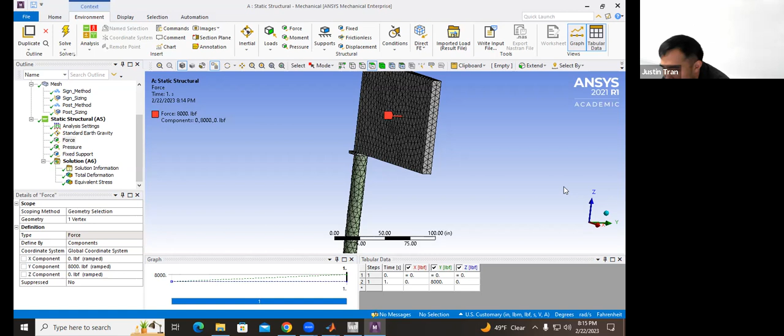So in terms of problem 5, state what the change is. Wait, let me check and see what exactly I asked. The thickness was changed by X amount. Yes, you should say that you changed the thickness by X. Oh no, I mean like, since when I changed the thickness I was using trial and error, so I had to change the mesh. Do I have to state that I changed the mesh? Oh no, you don't have to, you can just say you kept the same mesh settings and just had to remesh it.

We probably do want to. Oh, no.